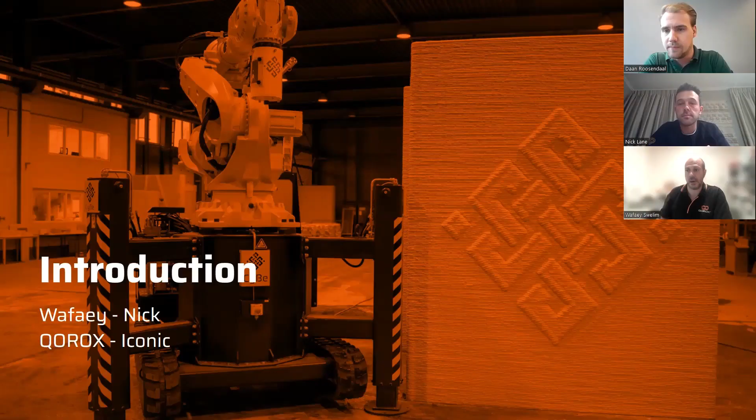I believe this would be the time that we start the interview with them. So sit back and enjoy. And if you have questions, again, feel free to ask them in the chat. Thank you for being here, guys. If you could help me introduce you a bit better than I just did in the live version, then that would be great. Wafaey, if you could introduce yourself for me, tell me a little bit about yourself and about your background. Same goes for Nick, obviously, after that, but I would like to ask you to start, Wafaey.

So my name is Wafaey Swelim. Originally from Egypt, and I studied architecture and engineering when I was in university in Egypt, and then I wanted to do construction management more than design. So I worked a couple of years in Egypt in construction management, and then moved to Dubai in 2006 during the construction boom over there, and lived there for 7 years, working all sorts of projects from doing fit outs for yachts for the royal family to working the Formula One track in Abu Dhabi, building a five-star hotel for Ritz-Carlton, and distribution center for Caterpillar in

Jebel Ali. And then moved to China and did the same thing over there, built the industrial buildings, and then moved to New Zealand in 2015. And why it's a long way around to New Zealand is because my wife is from here, and as you know, happy wife, happy life. All right. Thank you, Wafaey.

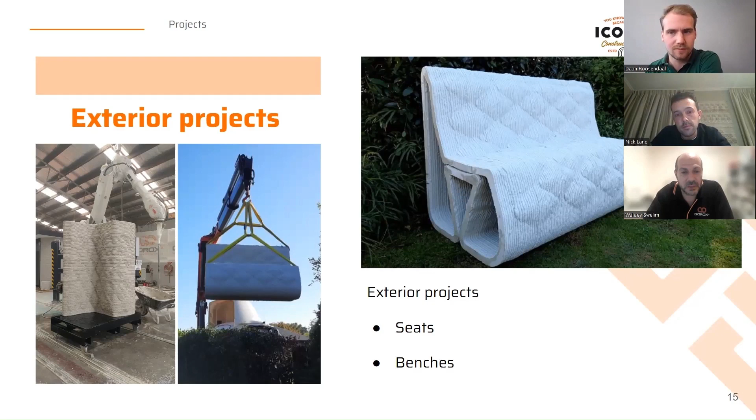And this, of course, exterior ones. We know that the outside benches, we've experimented with that as well. But this is interesting with a pattern as well. Yeah, so the pattern here is popular. It's more of like a weave pattern, or you can call it like a duvet, for some people. The seat that Nick saw was a smaller version of this one, and this client wanted something different in the backyard, and we delivered it. It's very simple to do. Cool.

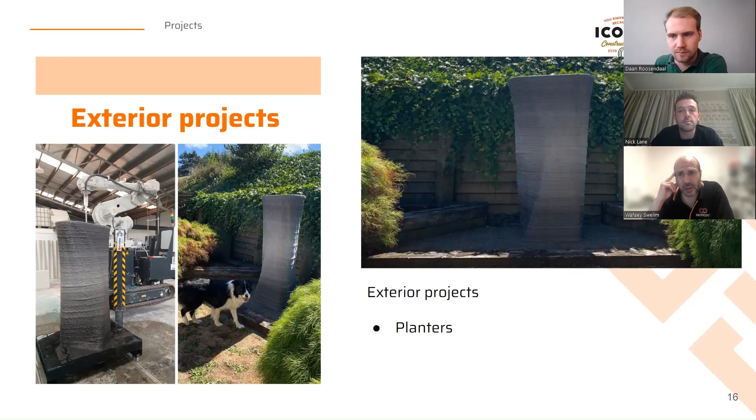Then, the columns and the potters or planters. Yeah, so this one we tried to play a little bit with oxide, so you have the fade in the middle. We started it with dark oxide, and then we put bags with no color in it, and that's why it gets lighter in the middle, and then we start with bags with dark color in it at the end, so that's why it fades in and out. And this 1.8 meter planter was printed in 12 minutes or something like that. It's not bad at all.

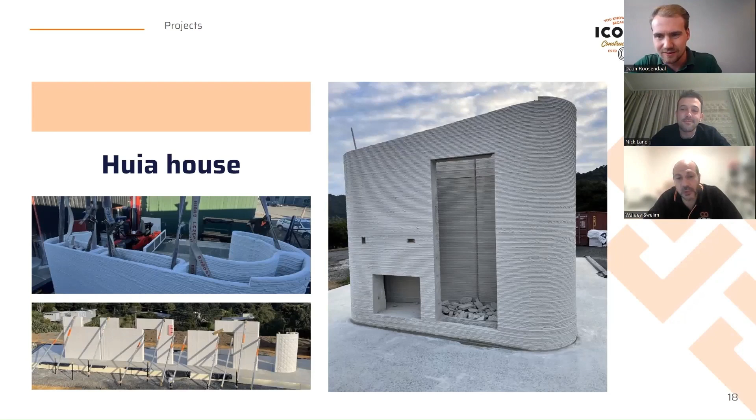This house right now is almost completed. It's in Paremoremo in Auckland, and I believe it's one of the biggest standalone houses in the world using 3D printing.

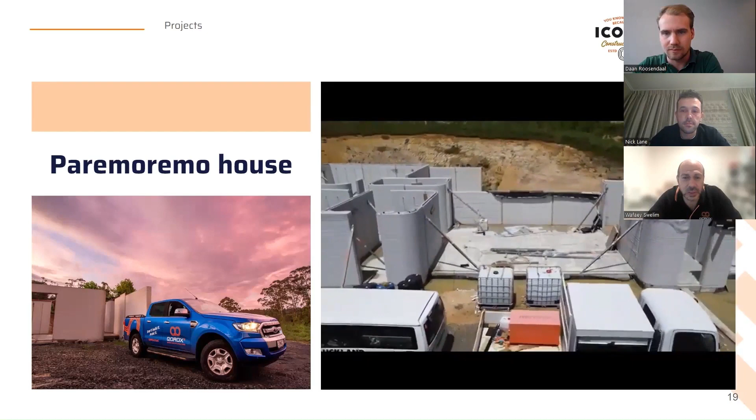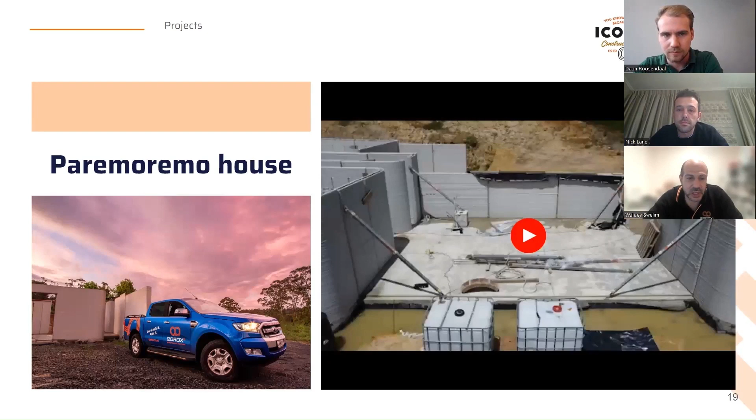This house had a mix of walls between retaining walls, banked against the dirt, and external and internal walls. So we had walls with insulation in them, walls that are just solid filled, and we printed this and delivered it. This has, I think, around 360 square meters of walls, and the house itself is 252 square meters.

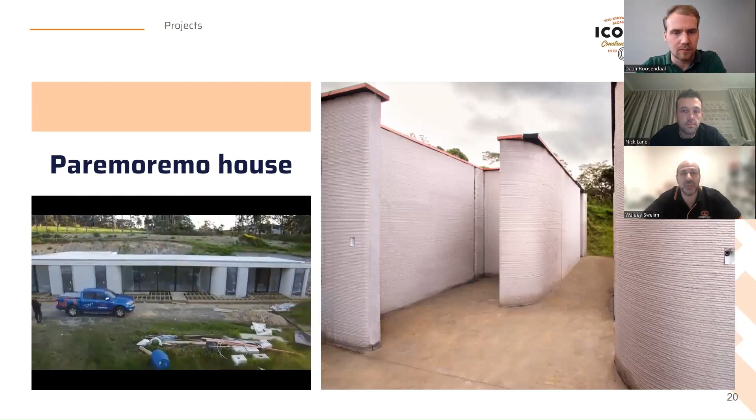So I think in Imperial it's close to 3,000 square feet. Did you say that? Yeah. And in the beginning, we kind of lost your connection there for a second. Did you say this is the biggest footprint 3D printed building, according to you?

No, it's definitely the biggest one in the Southern Hemisphere. I don't know how it compares overall, because there are some houses under construction in the States that are going to be similar size or even bigger. Know that this is the biggest one in the Southern Hemisphere, and it's one of the biggest ones in the world. I'll claim it's the biggest because I don't think that could be beaten.

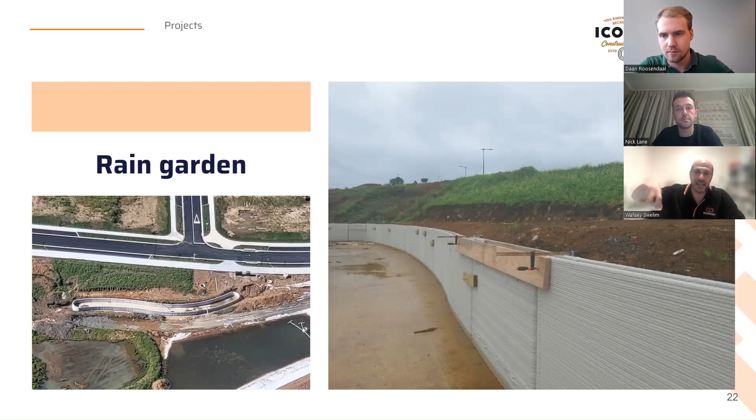Initially, it looked like an eel or sea snake, let's say. It had a head, and now it doesn't have a head anymore. Now both ends look similar. So the design freedom was limited not because of you guys, but because the guys actually had to use formwork to make the foundation.

Yeah, and this happens a lot when you can push the limits of what could be done, and then you hit traditional construction methods that aren't flexible, and you end up a bit stuck, not using the full potential of the technology. But at the same time, this was done a lot faster. This was 56 panels, each one different, and obviously we did not need to use formwork for them.

All of the panels were placed in 2 days. How many panels did you say there were? 56? 56 panels.

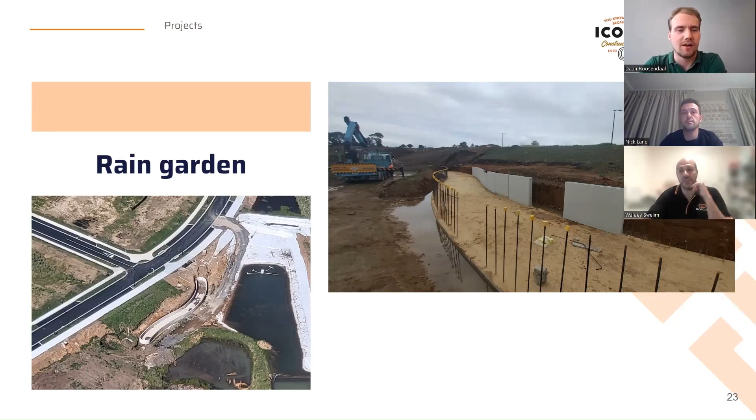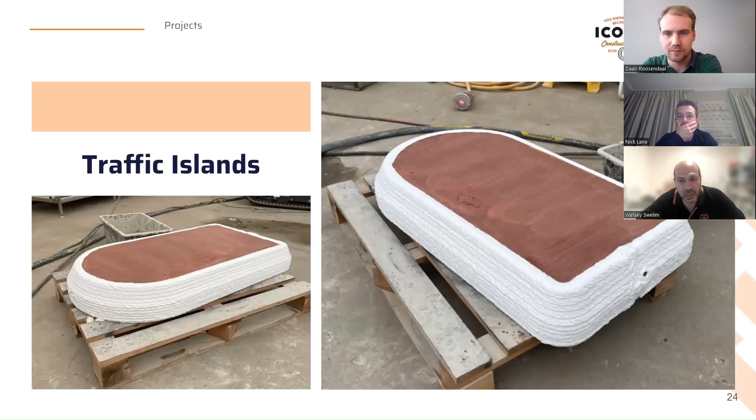Hats off to you. We started to deliver these - they are 3D printed islands that you put to protect pedestrians from traffic. I don't know if anyone has done this yet in the world. I think we might be one of the first ones. I haven't seen it yet. So the guidelines say you need to have it painted white, and you have used red oxide concrete on it.

And we delivered it just before Easter, and it's very, very quick. The sample is slightly smaller, the rest are around twelve minutes to print. This year it was under two minutes.

Was that a sped up video? Yeah, it was time lapse. I was just about to say, because that was really, really fast. I know this stuff is fast, but this was really fast.

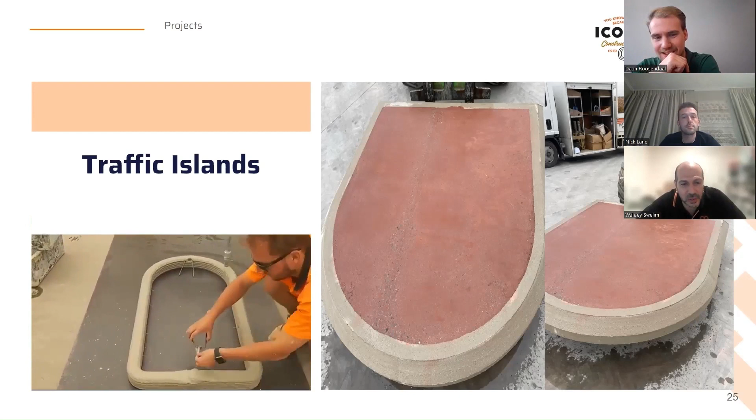And then I see in the picture on the right, you guys smoothed that while it was still wet, or was this after it dried up that you made it smooth? We have a little secret way of doing this to make it smooth from the get-go, so it's not post-printing, it is during the printing. Okay, and I reckon you're not going to be sharing that secret with us right now, which is absolutely fine if you don't want to. Well, if it was public info, it would have been a lot easier to share.

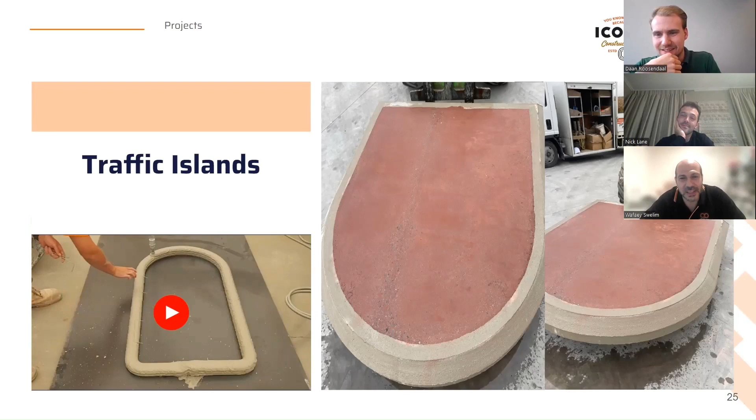Piles Eco Collars - that's an interesting looking print. I don't see those seashells coming out of our printer very often, so it would be great if you could tell us a little bit about that. With Auckland Transport, they also manage all of the wharfs and all of the small launching areas. One of the things they want to do is encourage marine life to regrow, especially after doing any expansion. So they are trying incorporating mussel shells during the print to encourage marine life to hang on it, and the other side doesn't have it. So some of the columns will have shells on them, some of them will not, to see if it actually makes any difference for the marine life to grow.

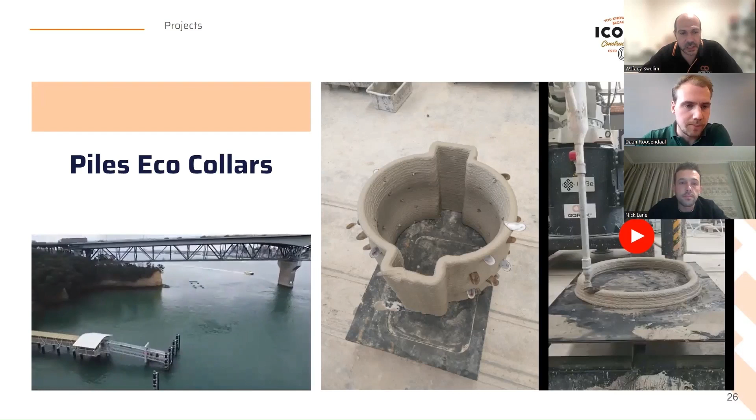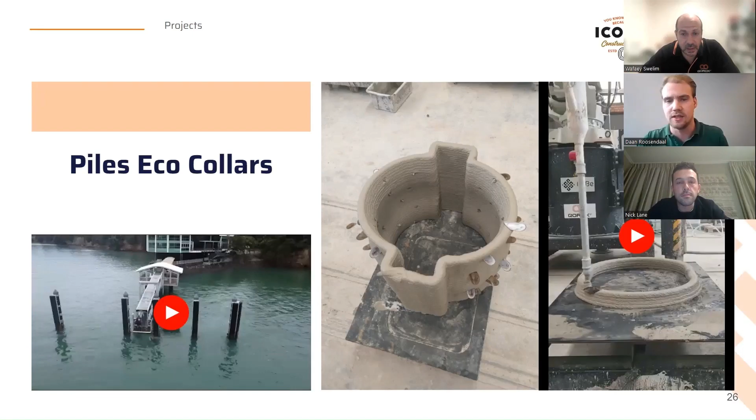So that was a bit of an overview of a couple of the projects that Wafaey and QOROX have done in the past. I know we talked about this in the chat - we are aware that Wafaey might be a bit hard to understand, his connection - we did lose audio a couple of times, we tried to turn up the volume, but it is what it is. That being said, as you saw, Wafaey and QOROX have done a lot of projects in different industries with different use cases. So we were wondering, which industry do you see the most potential for 3D concrete printing? Of course construction, but as you can see there's a lot of other applications. So we're curious, what do you guys think?

Affordable housing makes sense, we agree. Landscaping, yep, that's also traffic infrastructure makes sense - you just saw that. High-end housing, yeah, we have been in touch with a couple of clients that are interested in doing luxury villas and making it like a centerpiece of their building, that it is 3D printed, for the - how would you call that - for it to be extra special, right? Because not a lot of people have it. So if you want something new and high end or high tech, then that can also become high end.

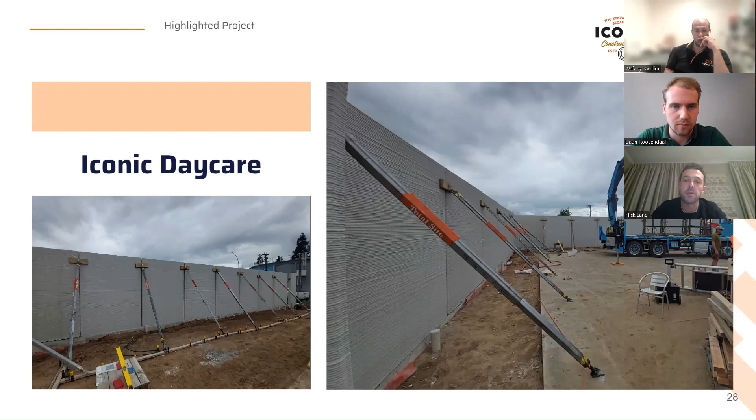The next part was just the speed of it. By the time we installed a panel, you can see in one of the pictures the HIAB that's lifting the panels off. We had an average of about 22 minutes install for each panel, with the fastest one being 17 minutes. That's from hooking it up off the truck to hooking the next one off the truck to place it next to the one we've just placed. So yeah, really fast.

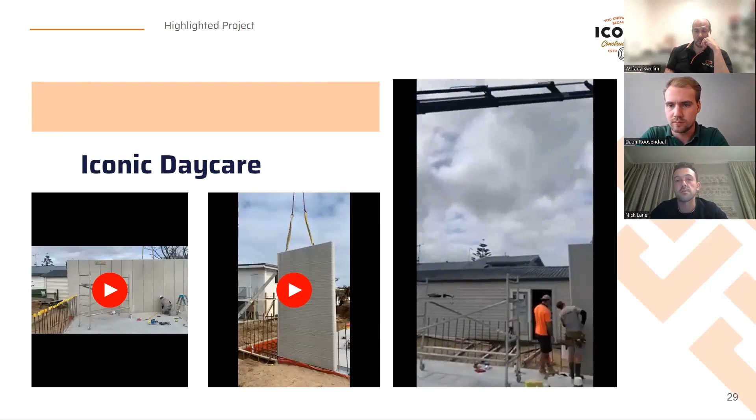The other beauty of it is because we're essentially working on a finished slab, you're not working amongst rebar with these big heavy panels like a precast panel, for example. You're not on a hole, you're on a nice clean surface, and very light to deal with in terms of - everything was lifted with a HIAB, so no cranes.

And you said - this might be a question for Wafaey, or you might know this off the top of your head - the average printing time of those panels, how many panels did you print a day, or how long did it take to print them all? So the printing was 42 square meters in a day.

It's only utilizing the printing for only 5 hours. Did you say 42 square meters a day using only 5 hours of printing? Yeah, so with 5 hours of printing, we were able to do 42 square meters.

And the whole thing was very quick to print because we did a system of continuous printing, so we would not stop between walls. We actually print one wall and then another wall and then another wall. We were able to print 3 walls back to back without stopping. And after that, the guys will have a break, we'll clean the system, and then we'll start again, and we can print 3 more.

And then the rest of the day was preparing for the prints and curing the prints. So that's why we think that if we have a 10-hour print, we can easily do around 80 square meters a day. And that's nice.

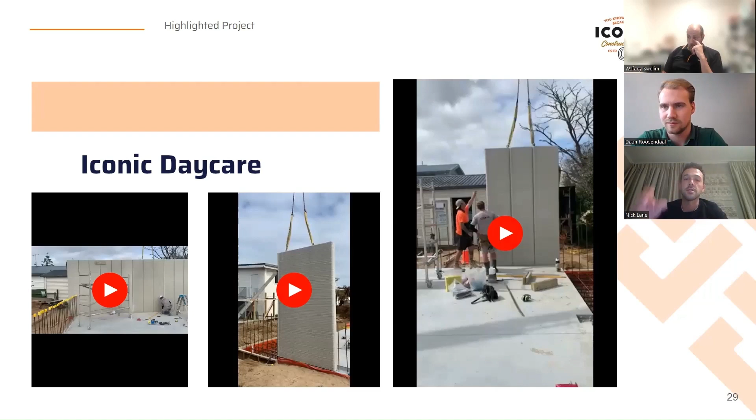And this project, as Waf touched on before, was the first project where QOROX had tried continuous printing one after the other, just with a repeat file. Having been down there regularly beforehand to see one-off prints being done, and now seeing like a production line going out a door, it just seemed like a real game-changing moment, both for us using QOROX and for QOROX themselves, in terms of what the potential of this stuff is.

And how did you guys, being used to traditional construction, how did your team look at this? Was it like, oh no, this thing is taking our jobs, or is it just the next step? Because that's something we get a lot, like, okay, now what about all the masonries and the workers? But it still has to be placed, right? So how did those guys look at it?

Yeah, I mean, we've a funny market over here at the moment where people are pretty busy, and employees are not burnt out exactly, but with everything that's gone on the last few years, people are just trying to wrap their heads around something different, which is quite a challenge for them.

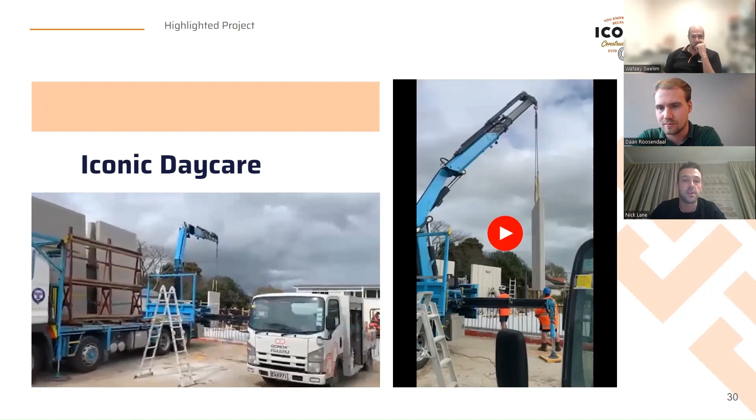So our biggest challenge really was to say to the guys, here's a new piece of technology, we're going to use it, and the reaction was, oh no, we don't know about that. But when we actually sat them down and said, look, treat it like a giant piece of concrete masonry block, their heads got around it a little bit easier. Literally after the first day we had the boys from QOROX helping us install the first panels, and after that they were away. It was simple, real simple.

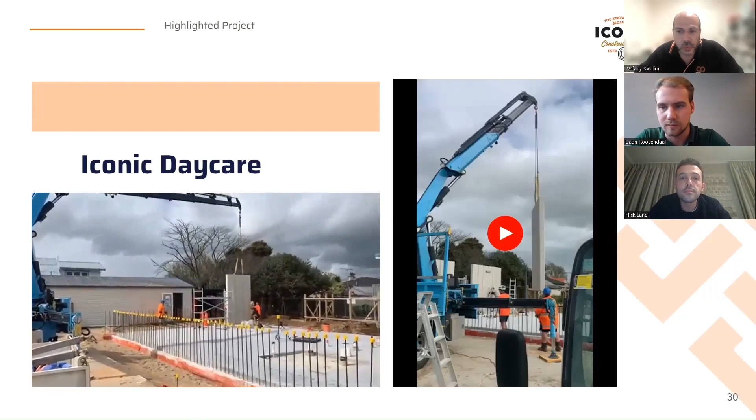So it also shows you that with 1 day of training, you can get a GC contractor to install the panels themselves, because we did not do the installation of the remaining panels. These are the first panels being installed, and we think it's a big milestone because these are the first panels for the first commercial 3D printed building in the Southern Hemisphere, and the first one definitely in New Zealand.

So our guys were there with them for the first delivery, and because of the speed, we did it in 3 hours. They took literally a 3-hour training, and then they were able to do the rest by themselves. You don't need months and weeks of training and installation. So general contractors can use the same workforce that they already have.

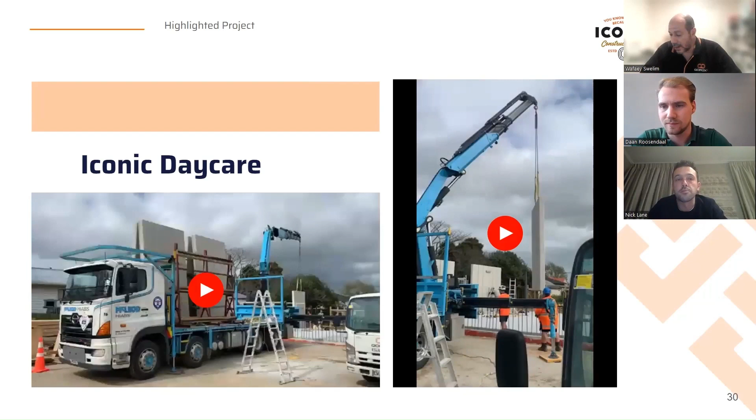They just need to have half a day of training, and that's it. And general contractors who have used precast will pick this up real fast. It's probably a simpler process than what they do for normal precast construction. Yeah, so that was going to be my next question. How has that learning curve been for the guys actually on the job site? But you just answered that brilliantly.

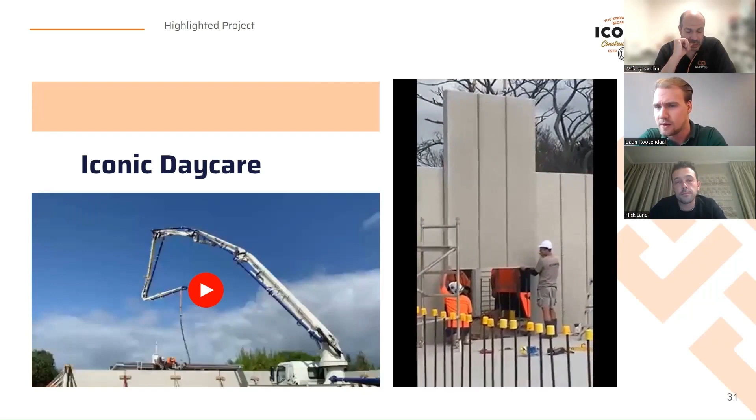3 hours of seeing the QOROX team doing it together with them, and after that they just picked it up straight away, right? Yeah. And after that, how fast? Because I believe Wafaey said it in the beginning with some other videos, but you guys placed how many panels in 1 day? Here the average was 22 minutes, and the best was 17 minutes. And this was in the Rain Gardens. We did the 29 panels in 1 day.

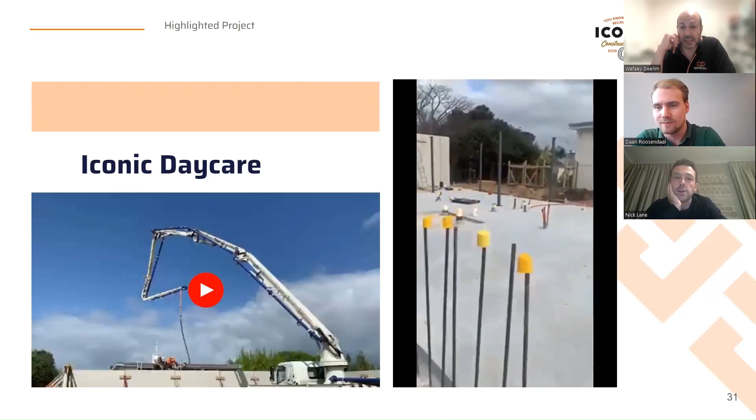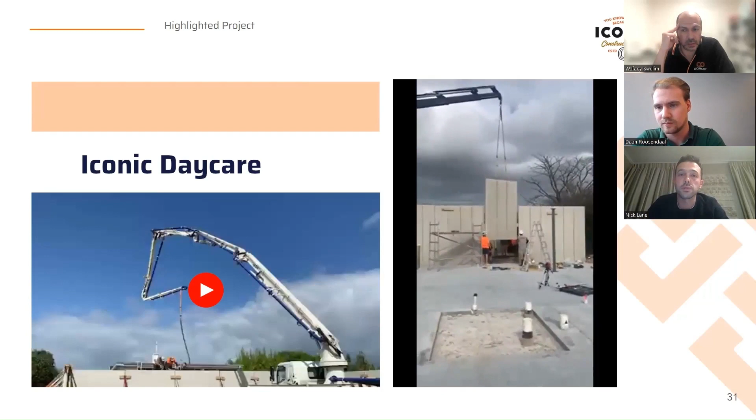That's insane. So I think total in here, Daan, correct me if I'm wrong here, Wafaey, was I believe 150 square meters total of walls. It was, we had 4 deliveries come up essentially to bring all of the walls up. So just a single truck with I can't recall how many panels on each one.

And literally it was about half a day from the truck to go down to the factory, load up, come to site, install, and then drive back to the factory and drop off the frame. A half a day for each one of those install times. So we were about 2 days of dealing with the truck in total by the time we finished this job. But it was stop start. It wasn't 2 days on site. It was half that time with it driving to site or coming back.

And then there was about another, I believe, 2 days of prep that we had to do inside the walls just to meet our seismic and rebar requirements within the wall. But the beauty of them was they were literally plonked on site, and once we'd filled them with concrete, you can see the picture of the boom there filling them up, the only thing we did to those walls after that was paint them. Right, and that was just for aesthetics, right? It wasn't really necessary because they are quite waterproof already.

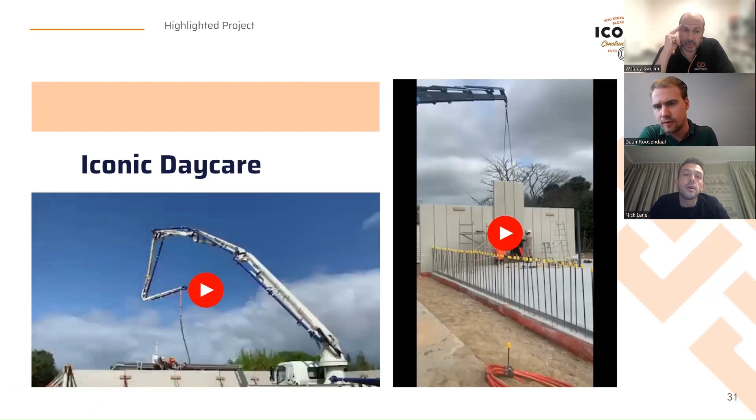So under our stringent New Zealand requirements, they're asking for us to seal them, which we did actually seal these walls, but the texture of it, there were a couple of little learning moments that came from this, where the boys were trying to get a little bit of stuff off the walls, and they used a wire brush on it, and it ended up with a bit of spotting, where it had almost taken off like a milky coat. So we ended up with a couple of little patches, which made the wall look a little bit blotchy.

Then I have another pretty important and scary question for me being in sales. Was it faster and was it cheaper? So please tell me that both of those are true, or at least one of them. No, but did you guys actually? Was it faster? Was it cheaper? How did the business case work out for you?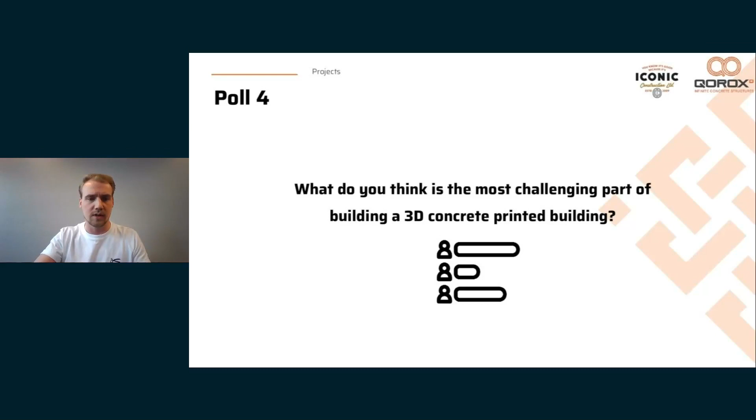We will look at the future and the impact according to Wafaey from QOROX and of course Nick from Iconic. So, where do you guys see yourself going in the future? What will be the impact of the technology in the future? I don't know if you guys have an idea about that, but that's a nice bridge to that subject.

So we've got, I'll jump in here. So we've got a couple of projects lined up for Iconic that we are now trying to really, excuse the pun, cement ourselves into using 3D printing for everything that we do. You know, we're still traditional builders at the end of the day, but our own developments that we do and trying to expose people to 3D printing has become our absolute motto on how we try and operate every day.

As far as we're aware, we're probably the only company like that at the moment in New Zealand who are really pushing that avenue. And at this stage, we've got a really good streamlined access to it. So working very closely with WAF, as we said, for this project we're 5 minutes down the road from each other the whole time. So it's been really good comms the whole way through.

And in Europe, well, if you're in Europe, you're quite close to us. Of course, we're based in the Netherlands. In that case, please also reach out and we can see if we can, as I said earlier, arrange a masterclass, a visit, or a short training course here on site. So there's a lot of options there as well. Same as in the US, feel free to reach out and we can see if there's a possibility to plan a visit.